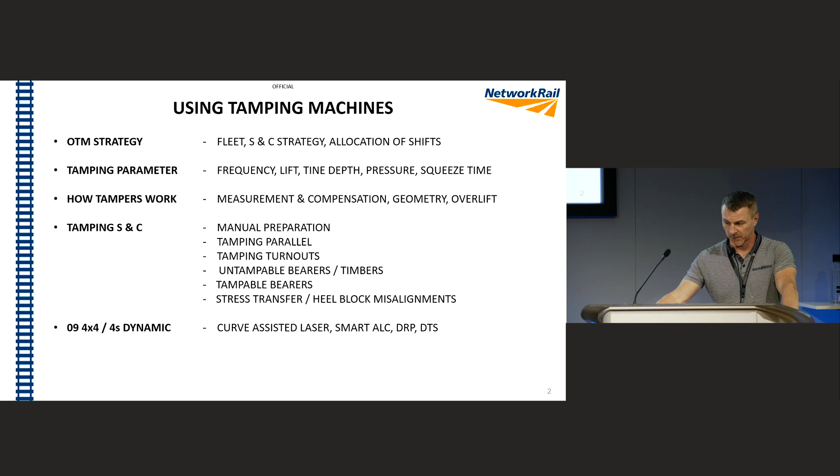First of all, we've got various machines in our fleet, and it's important to have the right type of machine for your particular route. We've got S&C machines, Plasser 08 4x4 and B41 Matisas. Generally designed as S&C machines, but we hammer them a bit on plain line, doing about 400 metres an hour.

Then we move on to our higher speed continuous S&C machines, working about a third quicker on S&C, probably looking at 900 metres an hour on plain line. Then our high speed plain line machines - I didn't actually realise some of the routes had these, 09 3Xs and 2Xs, 3 sleeper continuous tamping machines, very high speed, looking at 2,000 metres an hour. It's quite hard keeping up with them actually. I'm quite glad we haven't got them in our route.

Plain line machines, we've got 08 compacts, does about 500 metres an hour. Got flexible tines, but they're not an S&C machine - I've seen them used on S&C, and they're not an S&C machine. Very good for areas of guardrails, stuff like that. Finally, your stone blowers for areas that don't respond to tamping, and any specialist technology you might want: sprinter tamping, curve assisted laser, DRP, DTS and System 7.

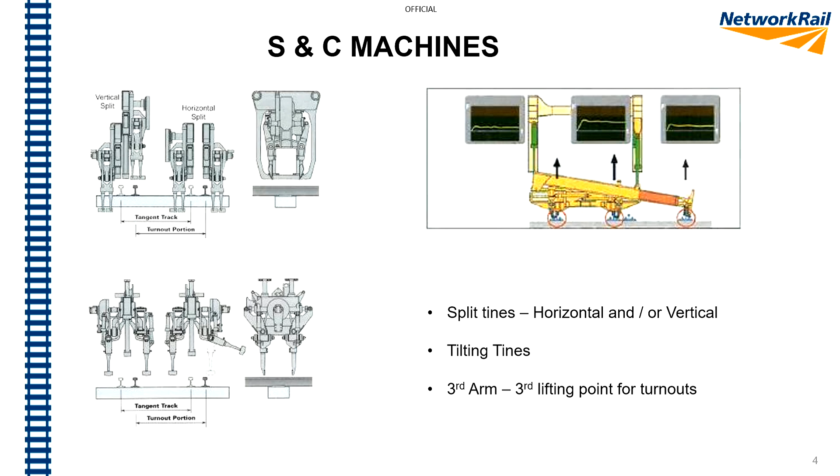Just to put these in though - to constitute an S&C machine, you really need three elements to it. You need to have split tines - as you can see in the top left, you've got horizontal and vertical split. You need tilting tines, and you really need a third arm lifting point for turnouts.

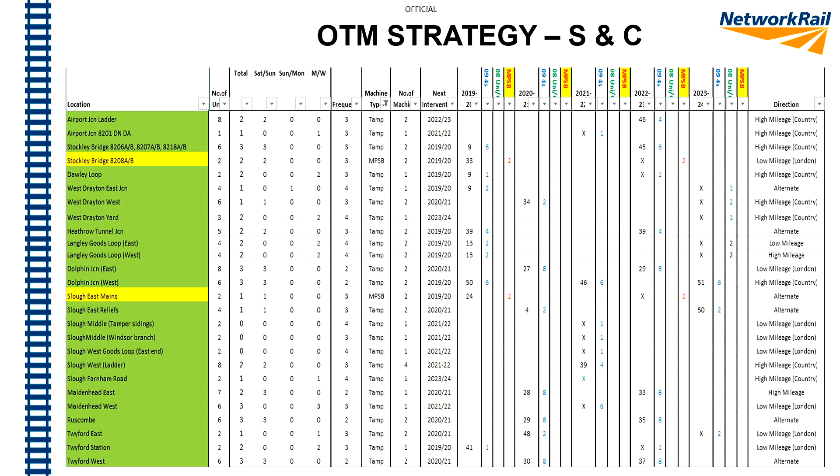Also, we spend a huge amount of money on our S&C, and we should really have a definitive strategy for it. I hear a lot of times, we haven't finished because we don't get that amount of time, or we never finish. What we really need to do is take into account how many point ends, whether we want midweek or Saturday night possessions, which direction, and frequency. What I did was go through every junction and identify exactly what you need. The caveat was: give me 16 hours instead of the usual 10 or 12, but then I'll only tamp that junction once every 2 years instead of every year. So give me what? It's better to do things better every 2 years than not properly every year.

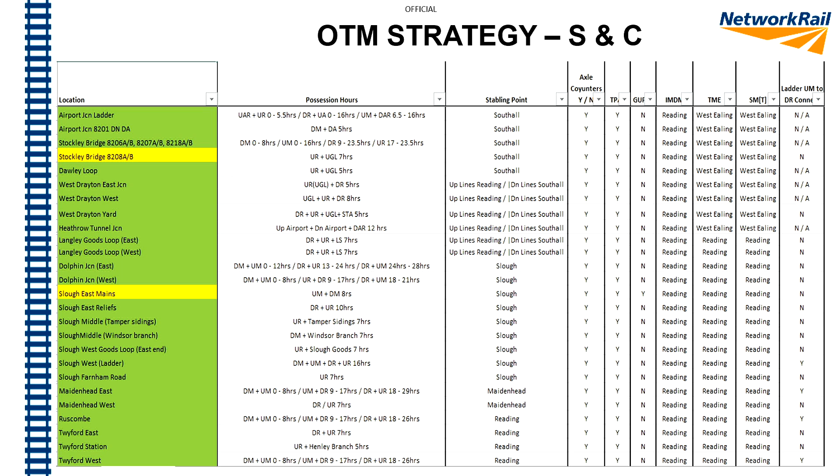Just moving on, possession hours as well. Particularly on our 4-line sections where we have complex ladders, just make sure you've got enough - sometimes you can have ladders where the two middle roads aren't connected, so you want your 2 outside roads and some time in the middle, or are they all connected and you want a rolling block. It's really important to get your detail right in your possessions. You get one hit at it and you need to do it properly.

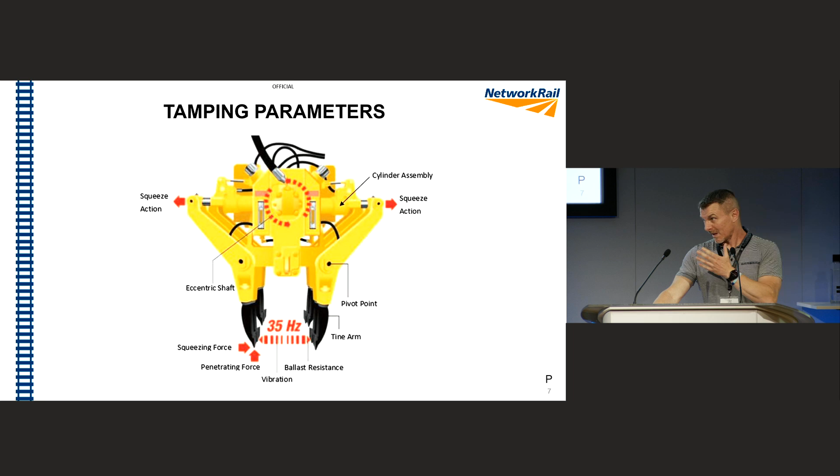So I'll have a quick look at tamping parameters. I just put this slide in - tampers aren't as complicated as what people think. It's basically an eccentric rotating shaft. You've got a cam that rotates. The cylinder assemblies squeeze outwards. It pivots on a point and consolidates the ballast under the sleeper. That's basically what they do.

Moving on, you don't really need to know the top two items on there. It basically vibrates at 35 hertz - 25 to 35 is the optimum, but we have to go up to 35 because we'd have trouble penetrating the ballast around 25, causing damage to ballast and component wear. Amplitude is 5 mil, so we generally get about 10 mil vibration.

These are the things that you probably should keep an eye on. If the operators are good, we generally look at 0.8 to 1.2 second squeeze time - 0.8 for renewals, 1.2 on the maintenance side, depending on lifts and whether we're double tamping. Squeeze pressures should be in that threshold.

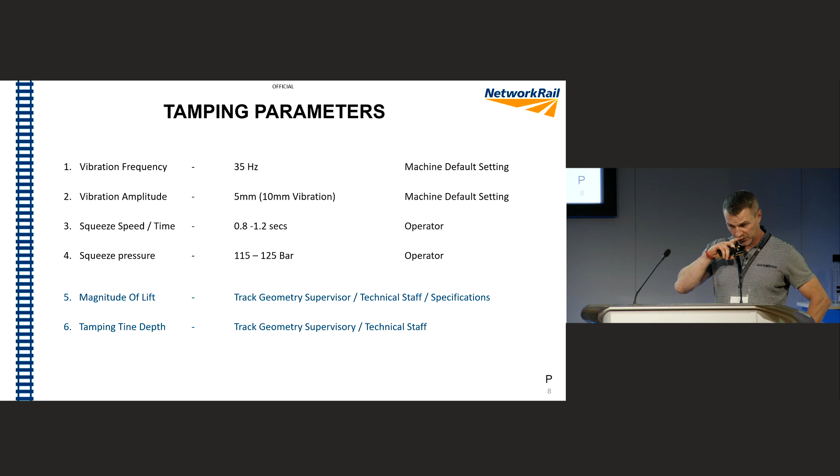A couple of reasons for that. There just isn't enough room to reconfigure the ballast under the sleepers, and under track settlement you're literally using all your lift, something we call ballast memory at times. So it's only when we get into the bigger lifts, about 25, 30, 35, that settlement becomes less of a percentage of the lift, and we get that durability.

The problem is we have standards that, under wires, dictate 25 mil lifts and slews. And the problem with that is we're not lifting the high points, we're lifting our track faults. So the areas where we do need to lift over 25, our lower points, we're just not getting the opportunity to lift it, and therefore we're losing a bit of durability.

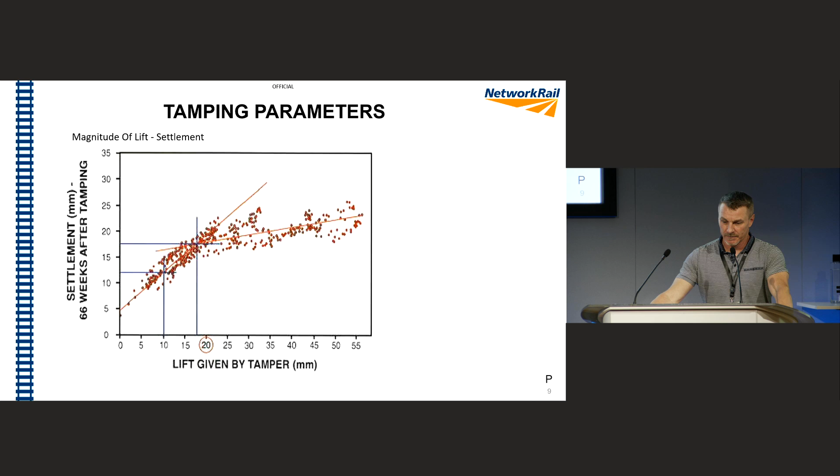And this one, tamping depths, probably our biggest and easiest quick win. The amount of times I see us tamping at the wrong depth is quite incredible, really. Too shallow, and we literally cause damage to the tools on the machine, and we damage the soffit to the bearers or sleepers. Too deep, and yeah, we'll pack it, but we lose durability. All we need to do is measure the top of the rail to the bottom of the sleeper, bearer or timber, and that gives us our construction depth.

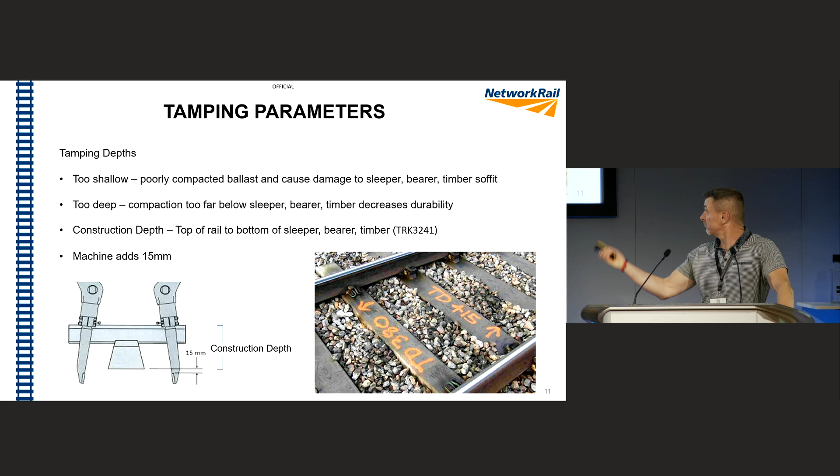There is a list of them in TRK 3241. The machine adds 15 millimetres and off you go, and just on the screen you can see that's how simple it is. Mark it up so the operator can see it, he presses a button and it changes the depth.

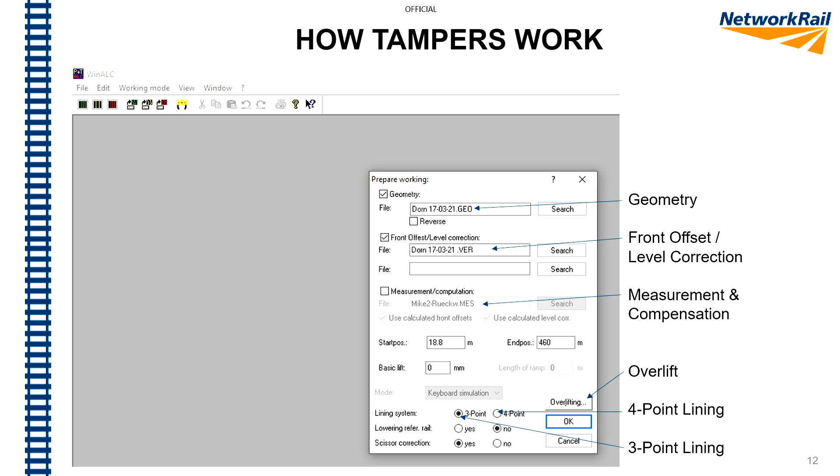Right, moving on to how tampers work. I did have a couple of slides on 3 and 4 point lining, manual ways of using the machine, but they fell victim to the Liam Jackson slide cull. So unfortunately I can't cover that, but if anyone's really keen, they can give us a shout afterwards and I'll go through it. What I will look at is geometry and measurement and compensation, and a tiny bit on overlift.

Just before that though, a bit of tamping basics. A tamper will have a datum rail where it measures and puts its adjustments on, and it'll have what we call a float rail where it applies the cross level or cant required. So just be wary of picking the correct datum rail - the low rail on curves, and on a straight you want your highest or best rail.

And what it also does, it uses a preload where it pushes its measuring trolley out on, and the operators should know this anyway, but they always ask you what preload it is if you're doing a design, and it should be on the running edge of the outside of the curve.

Just so people know, I threw this one in for awareness again - the tampers don't actually apply lifts and slews at the working area. They basically apply it at the front feeler trolley, so it's why they're called front offsets and level corrections. So what basically happens is, for lifting, it'll apply your correction and it'll just basically straighten out its lifting chord, or put the leveling transducer to zero.

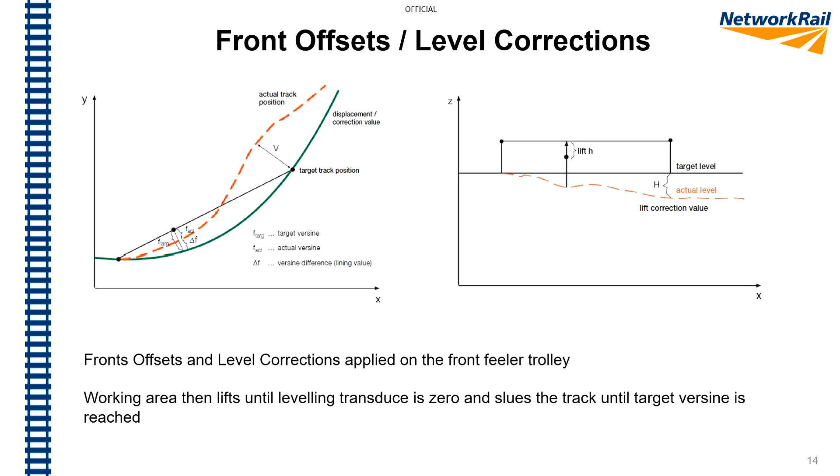And similarly with slews, or front offsets I should say, it basically moves the track over till it achieves its target versine.

Tamper software - we've got Plasser machines, we've got Win and Smart ALC now, and we've got Matisa, which has TGS and Gecko on there. I can only really do Plasser because we haven't got the simulation, we haven't got the program, the software of Matisa. However, we have got Gecko, and basically these do all your horizontal and vertical adjustments.

On the 3 and 4 point lining, one of the problems with it is when you go through transitions, you have to do a lot of smoothing because the tamper won't understand it, so you have to do a lot of manual calculations. Also on vertical curves, sags and hogs, and on a tight curve it will pull the measurement trolley in, so there's a huge amount of manual calculations we used to do. Fortunately, software does it all for you now, so it makes life a lot easier.

So I'm looking at measurement and compensation. I reckon we use this probably 95% of the time, apart from West Coast ATG. What happens is the machine traverses the site and measures horizontal and vertical versines, and it basically smooths or compensates them.

We can actually have a bit of influence on that, we can add our own elements. For instance, when it's going around a curve, we can set that curve to a single radius. Not a lot of people know that, but provided we've got sufficient slews to do it. If you're having a curve that's a mile long, it's a bit ambitious if you can only slew it 25 to have a constant radius curve, but there are options to do that. Vertically, we can put it to a specific gradient, leaving 20 or 30 metres between elements to give the track a chance to connect up.

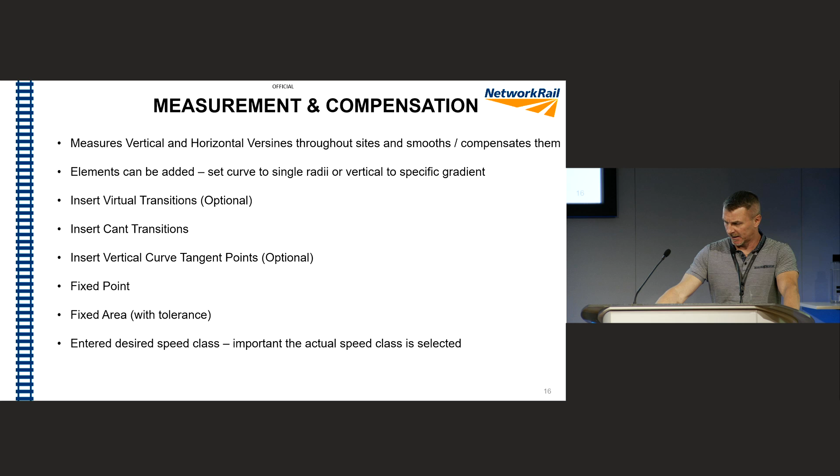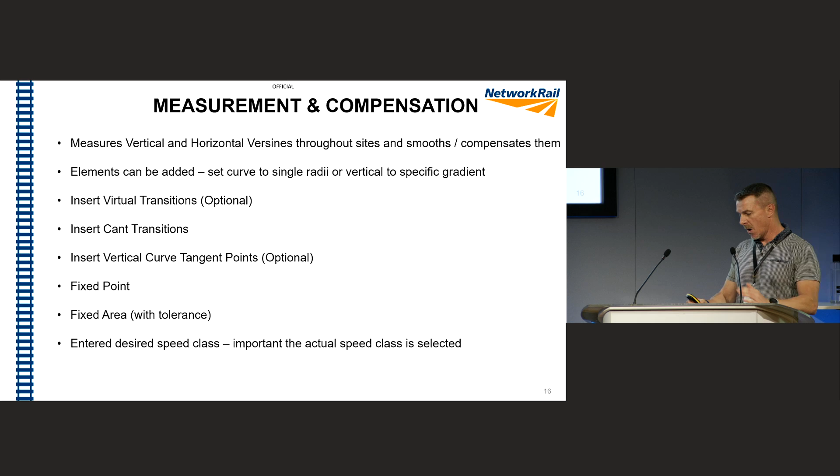Then we enter the speed class of the track, and the machine will smooth out based on that speed class. Now, there is a temptation - I've done it myself before I really understood it - to put a higher speed class in because you get a better quality in your work. But the problem is, the transitions are designed for the rates of change for that speed. So the tamper, if you put a higher speed in, will think there's a problem and want to extend the transitions at both ends to make it smoother. So always put in the speed class that's actually of the track you're on.

Here's a slide of measurement and compensation. I've messed around with this myself, so I'll go through it. On the left you've got your horizontal - hopefully you can see a red line there, which is your measured versines, and the green line is design. We move over to cant, and as you can see the cant follows the curve. Then we've got our level versines, and on the right-hand side it shows you what speed the track can go at.

Hopefully you've noticed the bars on your left - those are SD values. So you've got green for good and yellow for satisfactory. Now, those of you with keen eyes will see a brown bar on the very left-hand side, and that's where I've restricted the slew severely. I also put the speed category just for effect to make it really bad. As you can see, the machine will always try to compensate to good, but because I put those restrictions on, we've got a satisfactory and a poor on there. Had I not put those restrictions - and this is to emphasise the problem - we severely reduce the machine's capability to achieve good track.

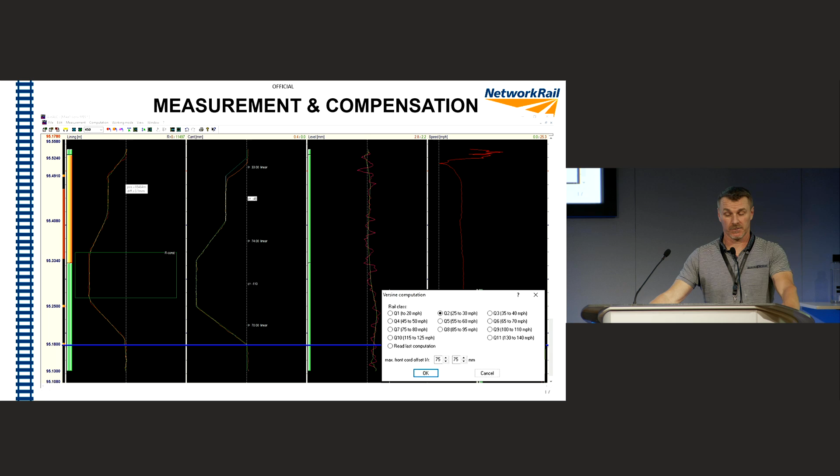There's the speed classes, bottom right-hand side. So that is basically what you do on a measurement run.

Right, moving on. Tampers measure on chords - these are an asymmetric chord, which means it's not symmetrical. Tampers are generally more biased towards the rear chord, about a third, two-thirds to the front. Now, the problem with using chords, there's a couple of issues. Tamper uses asymmetric chords because they're better on shortwave track. But if you have a look - imagine that's a chord on, it's a bit of a busy slide, don't worry too much about it - the idea is to try and show you a chord in a long wavelength.

The problem is, because the chord's inside a long wave defect, it distorts the amplitude and phase displacement - phase displacement is just the angle. So it distorts the size of the defect and the angle that it's at, and this is known as the transfer function. Now, ALC has built-in algorithms that define the inverse transfer function, so they can compensate for this. When you're inside a long wave defect, the tamper can realise that and adjust accordingly. On top of that, it's got a factor algorithm - there was a lot of experiments and research done on it, using a long optic to verify the results. What it does is use a number of algorithms to extend the chord, so our tamping machines can work at 5 times the chord length, and can actually correct defects of 90 metre wavelength.

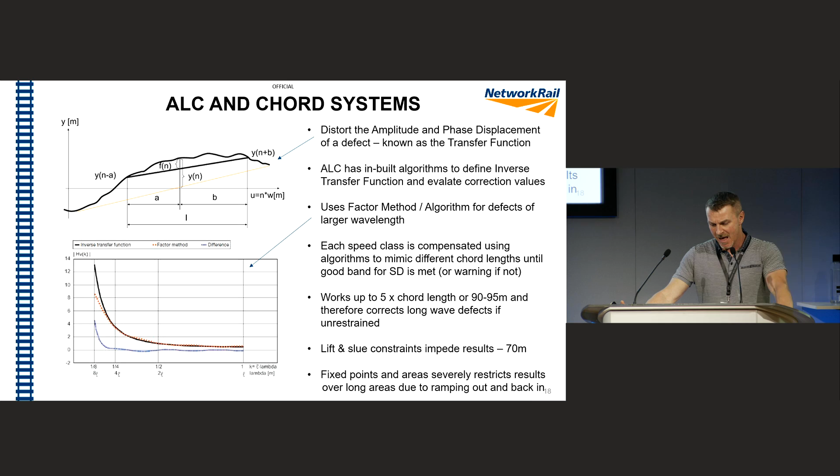So as you can see, there's quite a lot more to ALC than what people think. It's a great system, we just don't let it work. And on top of that, not only do we limit the lifts and slews to 25, we then come in and put fixed points in, which severely restricts it even more.

And the best one is when we're doing crossovers in S&C. Come to the crossover, most important point, and we'll put a fixed point in, and people say no slew here or 5 mil there. And so not only are you doing that, the tamper's got to ramp down. It can't just go to slew and zero because we leave it.

So if we're doing a 25 mil in S&C, but you've got a no slew or reduced slew, don't forget the tamper has to ramp down at about 1 in 1,000, that's a default setting. So 25 mil is 25 metres of ramping down, and then it's got to ramp back up. So by putting fixed points in, we're just severely restricting what these machines can do.

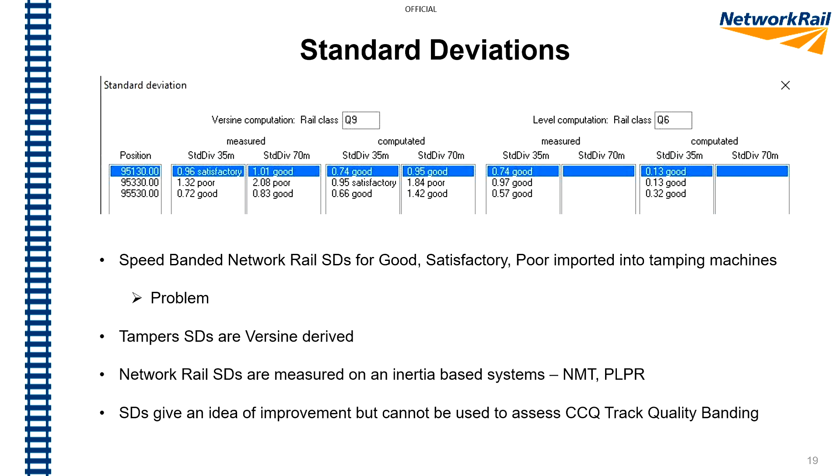Very quickly, the machines have got all the Network Rail SDs imported in. The only problem is that the tamper SDs are Versine derived and the Network Rail ones are inertia based. So it's apples and oranges to an extent. They're similar, but if you get good on a tamping machine, don't be surprised if you don't get good when the NMT runs along it, because they are slightly different, but it definitely gives you an idea.

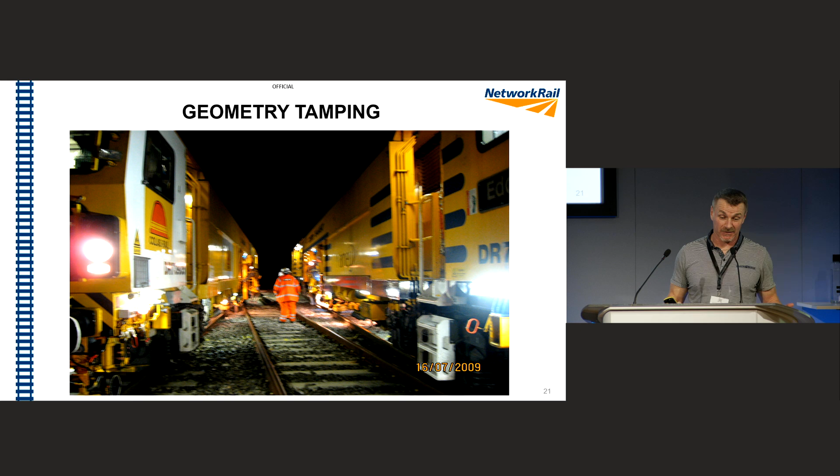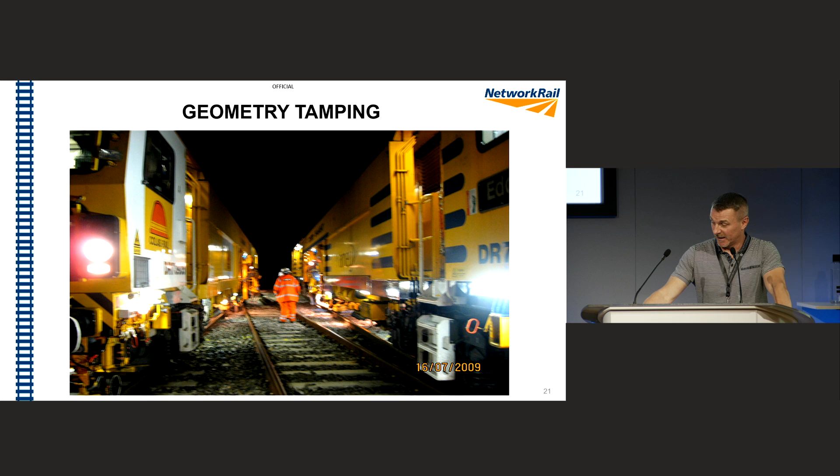Moving on to geometry tamping. We basically need a design for this, and we generally do a geodetic survey. We use a symmetrical chord, generally 20 metres. This is better for long wave stuff, particularly around 40 metre defects. We might use a theodolite level, total station, and we have various kit to help us do this.

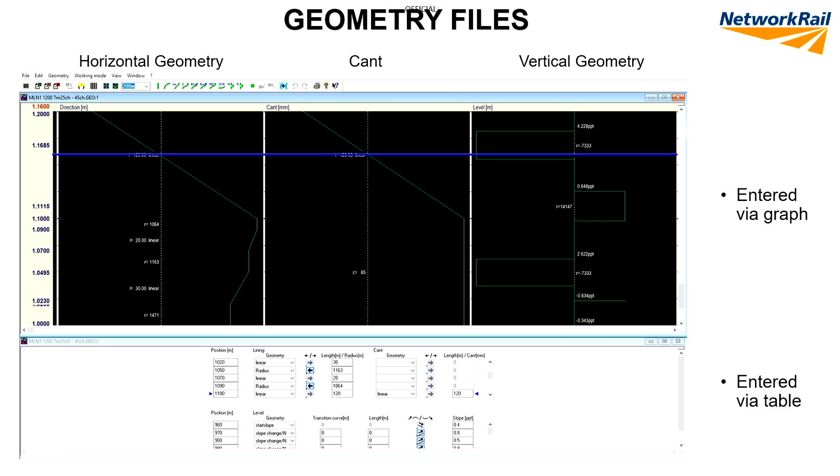And once we've done a design, all we do is just input the design. So on the left-hand side, again, it's the horizontal - that is basically a right-hand curve going into a reverse curve. You can see the cant in the middle reflecting the reverse curve, and you've got the vertical on the right-hand side. So each line is a gradient change. The boxes on the left are sags, and the boxes on the right are hogs, and you can see the curve radii.

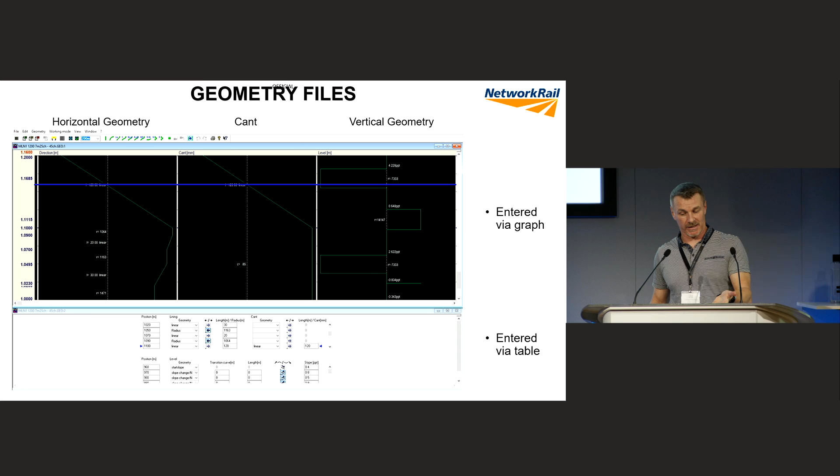So you can enter that by pressing on the graph and putting an element in, or doing it in the table - much easier to do it on the table, actually. Same with Versine, same with front offsets, level corrections. You can either enter them on the graph, or you can do it in a table, or there is a cheat mode. One of the lads on the West Coast actually devised an Excel spreadsheet where you could directly import them into there. And unfortunately, it was about 17 years after we've been using it, but I suppose better late than never.

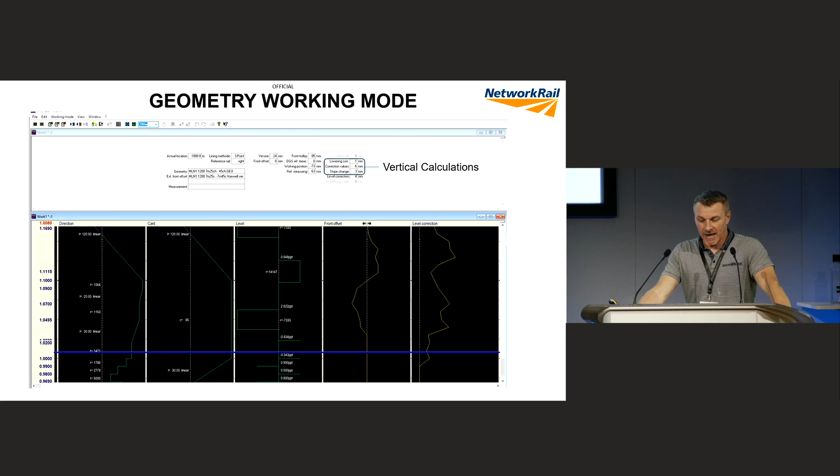Geometry working mode. So I've put the vertical calculations on there, the ones we'd have to do in manual mode if we were 3 and 4 point lining. As you can see, hopefully you're getting used to this now. The horizontals on the left, then our cant, then our level, and then our front offsets and level corrections. That's basically geometry in working mode.

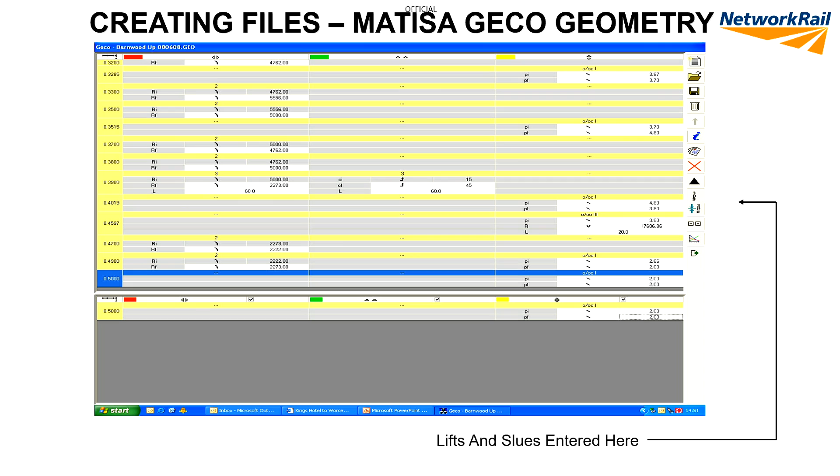This is Matisa GECO, the equivalent of WinALC. As you can see, not as user-friendly, takes a bit more getting used to. A couple of things you've really got to watch: Matisa GECO works in kilometres, whereas ALC is metres. Also, crucially, you have to put the full vertical curve length in GECO, whereas in WinALC it's half the curve length, so don't get them wrong. And finally, both of them, the gradients are parts per thousand, and we design in percent, so always times it by 10.

Why use geometry? When we get precise control through structures, it's absolutely essential for S&C. Anything that's tied, we need to know what we're doing with one road, so we get coplanar timbers and slews that are harmonious. Also good for palliative lifts.

We used to do a lot of these quite a few years back where we'd have formation failures. We used to lift the track by about 4 to 6 inches, probably unheard of now, coming with a ballast train, and that was a good life extension exercise.

Also good for advanced tamping. Obviously the staff that work on the ATG couldn't do their job without geometry. Good for MSAT, curve-assisted laser.

We could also, using some of those formulas that I pointed out on the graphs, design overlift. We can actually do a design and then predict what overlift we can put on. And obviously, because it's improved quality, it's less intervention, greater durability.

We don't have to mark up the track. Anyone that's worked with an O7 knows it's a bit of a nightmare, actually. You had to put all the slews on the sleepers, all the lifts on the rail, and you'd have some poor soul trying to wind them on in the tower. You'd look behind the machine and it was a mess, and you'd just wait till the relief came on. It was an absolute nightmare.

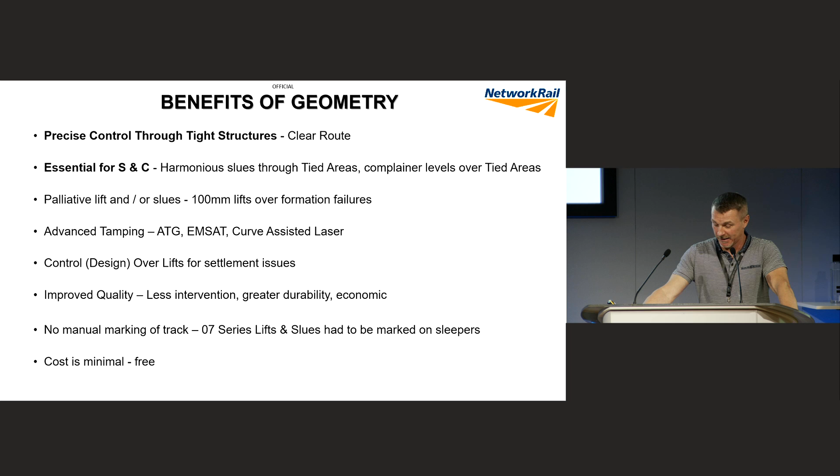And the cost is minimal, it's free, it's built in on the machine, so it's there.

So this is one to do with a design we did using ClearRoute. This is an interesting one - those with keen eyes will probably make out a steam train. We had to slew one track out the way 8 inches so we could slew the other track into the right position to get the steam train through.

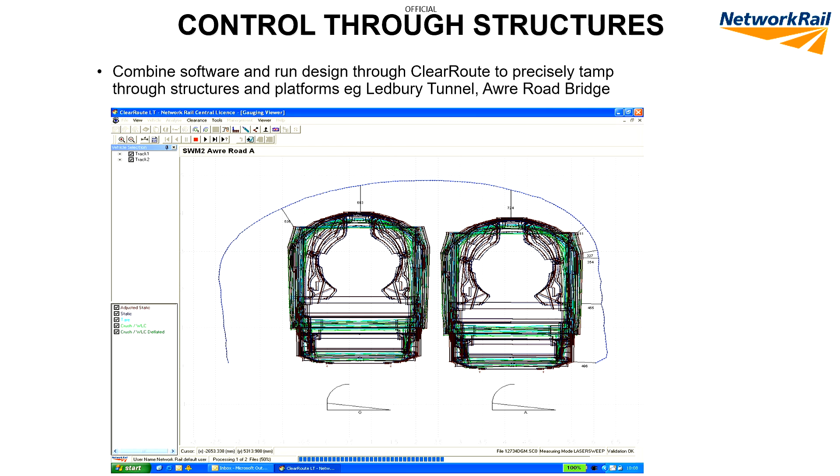Anyway, we did this - I did this in one pass, actually. These are the days when you could do that, by the way. Yeah, just saw a few wry smiles there. Now it's basically where you're allowed 75mm lift, 75mm slew, and 50mm cross level correction. So please don't go saying some bloke from Weston said I can move the track 80, because that's not the case now.

Anyway, we basically got that in one go, and just a couple of weeks before the job there was a rail defect, quite an old one - 1968 F19 actually, a pretty old track, riddled with defects, 109 lb rail I think. They took the defect out, and as usual didn't have time to re-stress it, so they had to put it back in as a red item. But we'd actually come in and slewed it that much that when the staff came in to re-stress it, they cut into it, took the stress-free temperature, and it was 26.7 degrees. If I'd known that, I could have sent out a job number and got some money for it, but there you go. So yeah, it's an interesting story there.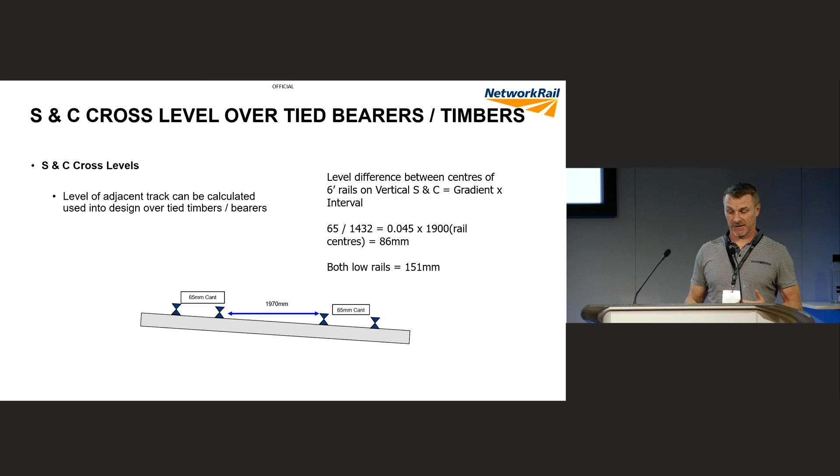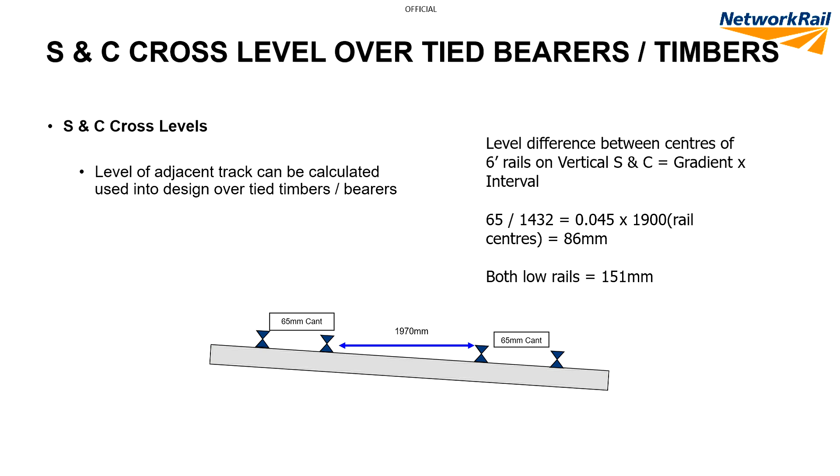It's really good for designing crossovers, really easy - just get your tied area on a crossover, calculate and design your low rail first, dead easy. I did an example here: 65mm cant on a standard interval, your 2 low rails is 151mm difference. So what you do is design your bottom rails, then just add 151 or whatever it is, and design in and out of it. Very easy to do, and it gets all your bearers and timbers coplanar.

Overlift is basically where we design above our target area to compensate for settlement. This gives us our durability because we're taking into account how much the track will settle. If we just design it to where we want after settlement, it will end up below, so it's just taking that into account.

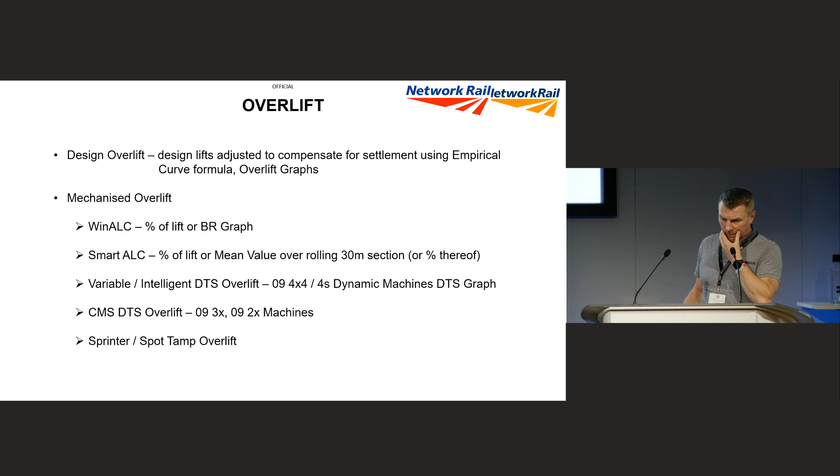We've got various ways of doing this. We can design our own overlift using our own design, or use various options on the machine. With ALC you can do a percentage of the lift, or there's a BR graph from the 1960s from some research. The new 09 machines have smart ALC, where you can do a percentage of the lift, or a mean value rolling over 30 metres.

So basically anything under that mean value gets overlifted to that point, or you can do a percentage of it. We've got intelligent overlift DTS, done on recent research about settlement after DTS. We've got the older DTS machines, the 09s, which have a slightly different system from older research. And finally we've got an overlift option on the Sprinter, or spot tamping.

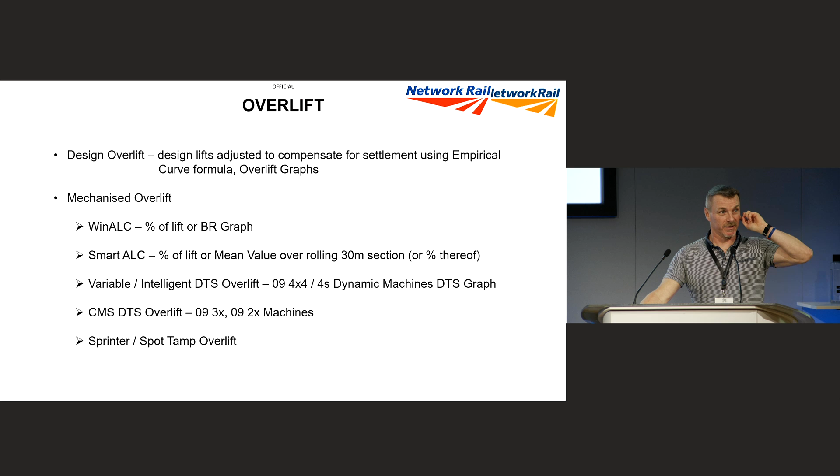I haven't got time to go through Sprinter tamping or overlift in detail, but the communities of practice are run by Gary Smith - I was hoping Gary would be here, I'll point it out, but he's probably skulking around the screen in Tamworth somewhere, so he's got away with it. Hopefully we'll have something done by August, so if anyone's really interested in Sprinter and overlift we'll have a definitive guide then.

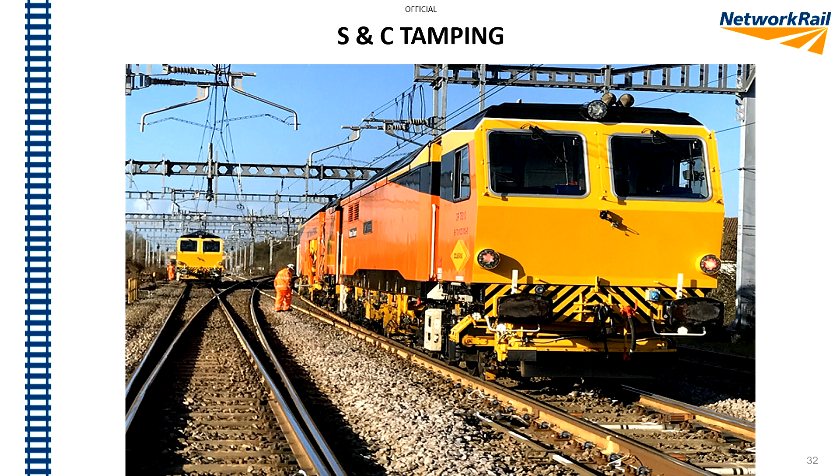So we're moving on to S&C tamping now. First of all, tamping parallel - traditionally we used to do this with one machine, using a third arm not designed for a crossover, right, it's designed for a turnout.

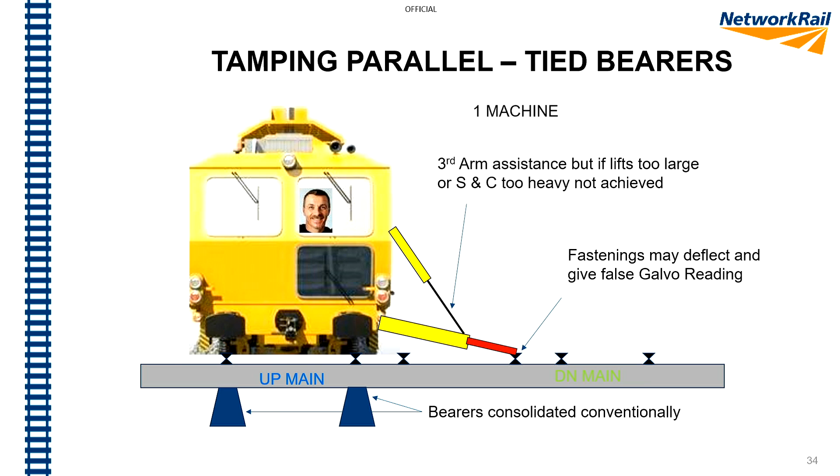So what we used to do was basically open the fastening. We used to think we were getting cross levels, opening clips, ruining clips, and then as soon as we let go it would fall back down. It's labour intensive, time consuming, and inaccurate.

Basically, if it's a crossover, don't use one machine - that's the message I'm trying to get across. Use... yeah, it's Neil Denton joined us there as well, it's very nice of him, isn't it?

Yeah, so if we're using basically 2 machines, what you've got to do is connect the machines up. Now if you've got a layout with high resistance fastenings, concrete bearers - say if you've got e-clip or Fastclip or something - then you connect the machines up and they'll lift together harmoniously, but basically you have a primary and secondary machine.

The primary machine will be the one that slews, and you turn the slewing off at the first tied bearer and turn it back on at the last. So basically they both lift, but the primary machine slews. And that's what it says in the standard.

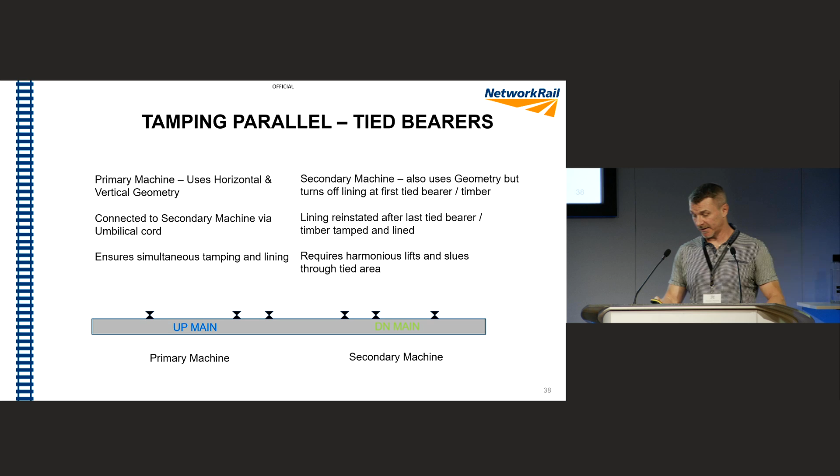So by turning the alignment off, you will end up with a misalignment. So you've got to make a judgment. In this case, what we basically do is lift harmoniously but slew independently, but try and keep the slews in. Every now and again they'll be fighting each other, basically because you might have gauge problems or some other issues in there.

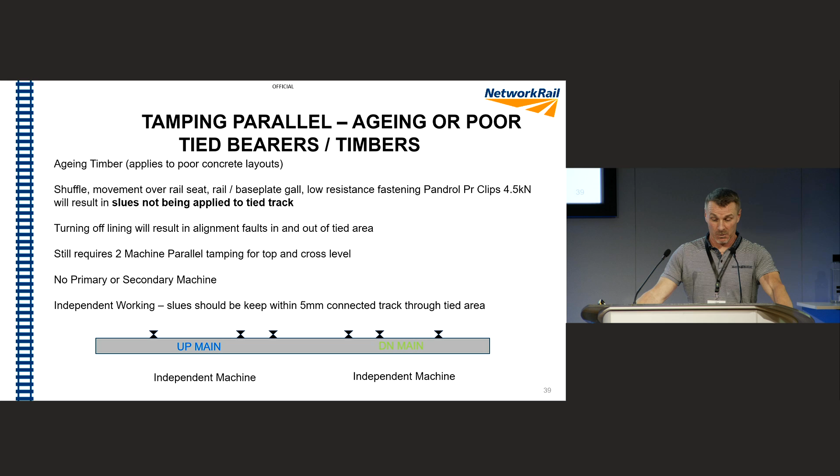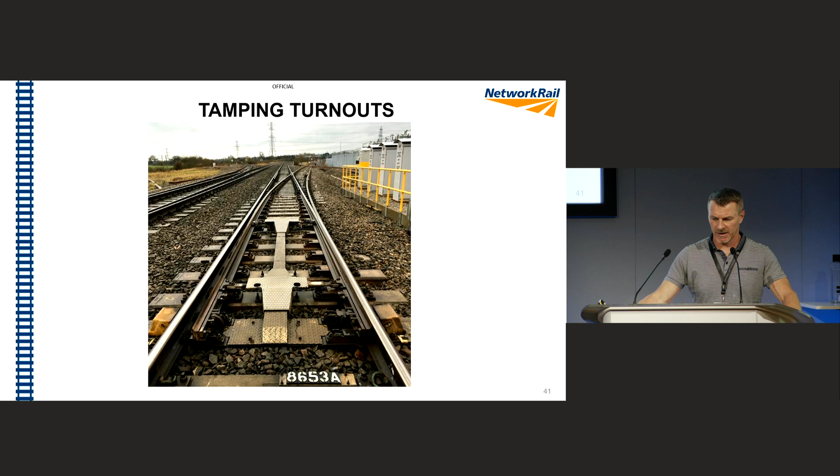So just be very wary. What the standard says is great for renewals and new layouts, but I tell you now, and there's people watching around the country who know, it does not work on these older layouts and you end up with a misalignment. So use the machines independently, but be wary and try and keep your slews within 5mm. Right, moving on to tamping turnouts.

There's a bit more to this - it's more difficult to tamp a turnout than a crossover. What we traditionally do is take the through route, do the through road, and then do the turnout road. What happens is, again, we get the third arm out.

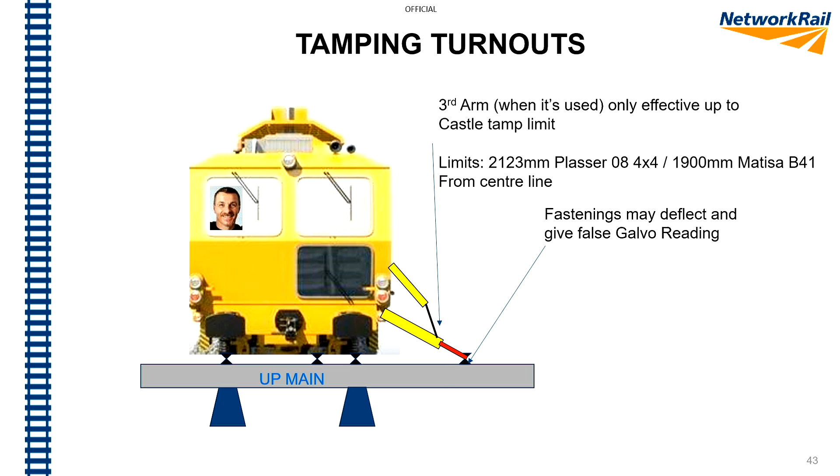The limits are there - for Plasser it's 2.1 metres, for Matisa it's 1.9. Again we lift it up and the fastenings deflect, they open. We let go and it falls back down, even though on the machine it said we got the cross level, because we're basically just opening clips. Where the track's tied, we've got that because we're not getting the cross level.

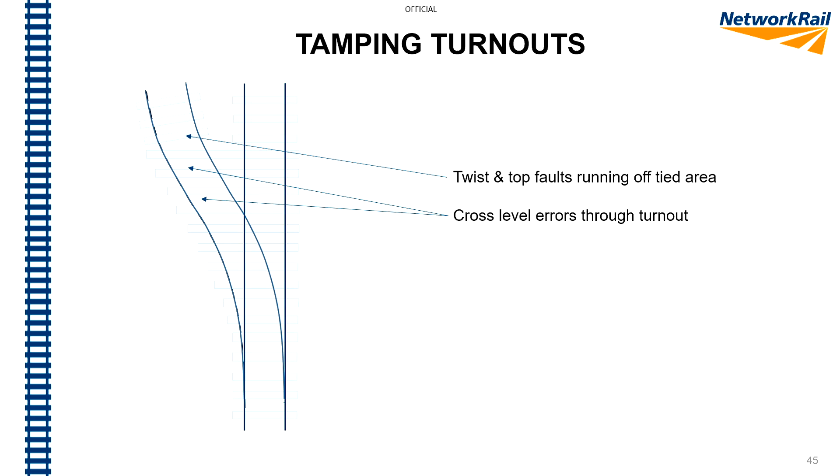As soon as we get back onto the plain area, we've got that. So we have cross level faults through the turnout and we'll have a twist on there. I've seen that happen on numerous occasions.

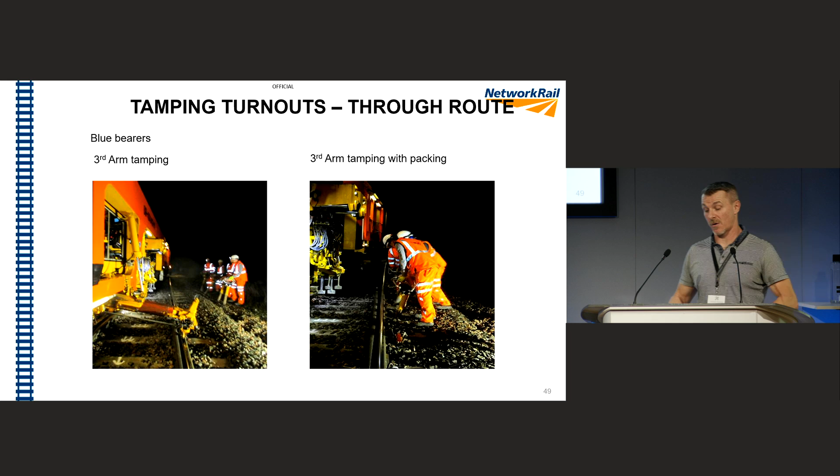However, when we get a bit further on, the blue bearers, we need a bit of assistance, so we bring out the third arm and some packing. The castle tamping limit's gone now. So we get the third arm to help, but then the operatives come in and pack it - it's basically to keep the cross levels, because we'll come back with a machine and consolidate it properly afterwards. So we have to do that.

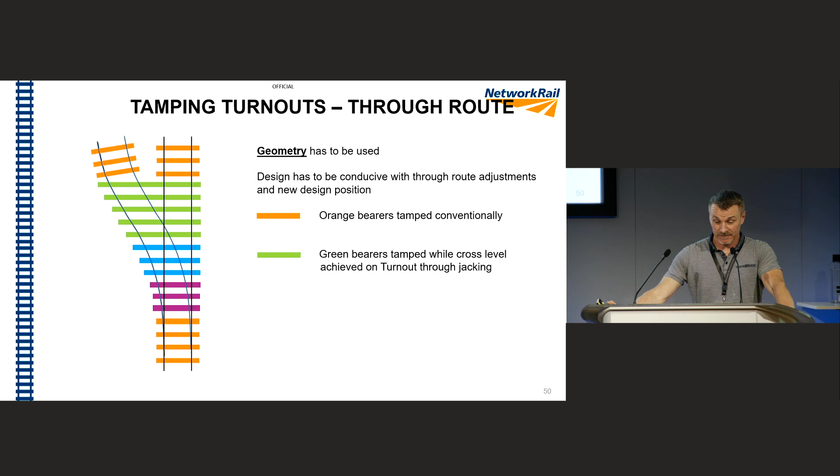And then as we go through, it gets to the stage where the third arm limit is reached, and then we get to the green bearers. On the green bearers we're literally relying on track jacks, so you need your staff out with jacks and you literally jack up. You can actually put a cant gauge on it, but I prefer to look at the level galvo, the centre galvo in the machine - when it's 12 o'clock, you've got your level. So you jack it up, hit 12 o'clock, lads come in and pack it, staff come in and pack it, and you can then move on.

And then you get to your orange bearers on the plain, and you can just tamp conventionally. But as you can see, there is quite a lot to tamp in a turnout. And that's just the through route.

So when we get to the turnout route, we can ignore the purple bearers because we've tamped and consolidated them via castle tamping. But the green bearers are the ones we've just packed manually, so they need a proper squeeze - we're not lifting or lining, we're just squeezing with the machine to give it compaction. Then when we get to the blue bearers, which is the first plain bearer, we basically get the design back on. Obviously the design has to be conducive with our adjustments on the through route, so you need to make sure you take into account what you're lifting and slewing on the through route, and then you can execute your design on the turnout route.

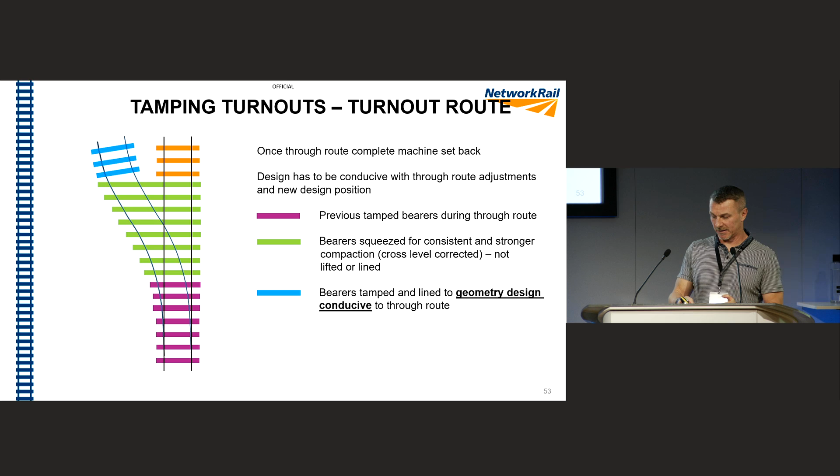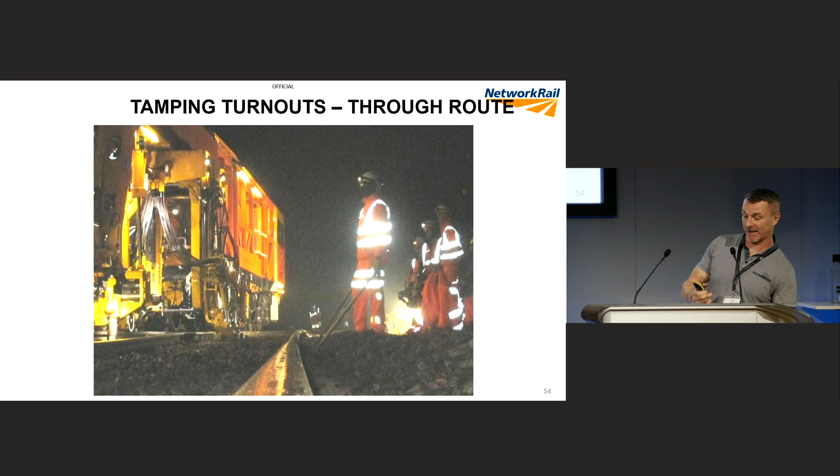As you can see, this is probably one of the biggest examples I've got. You can see how much we actually jack. You can see this was a double junction - the cross levels were absolutely way out, and you can see from that picture how much we actually had to jack that one up.

So we come to the first plain bearer, and at the bottom where that's the front trolley of the machine, the blue line, we're basically on the geometry, so we're just cross-level correcting until we come - and you can see the lift on the first plain bearer where we bring the geometry in. That was 57 mil.

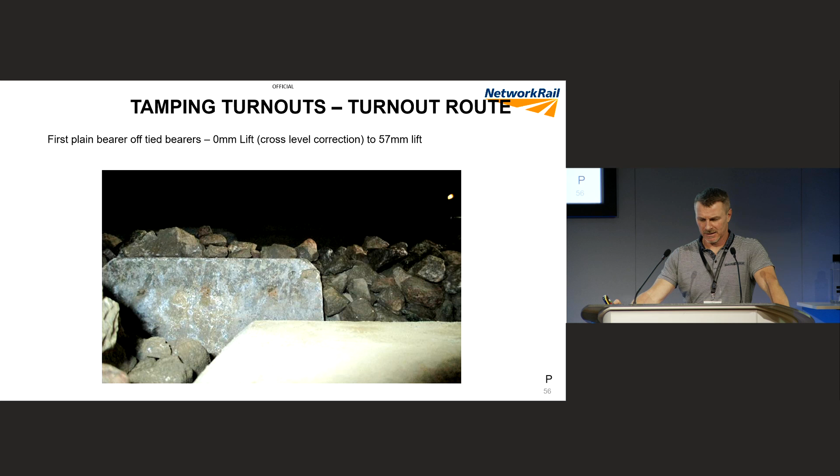So I had the operator saying, God, I've never ever done that - he was flapping a bit, never done that before. But I got out from the machine and, yeah, because we corrected the cross level that much, I measured that to be 56 mil, so I can take 1 mil out. But yeah, because we brought it so much back up to cross level, you could see - we went from 0 to 57 mil lift over one bearer. I'm quite glad I don't do that on every shift, to be fair.

Moving on to untampable bearers.

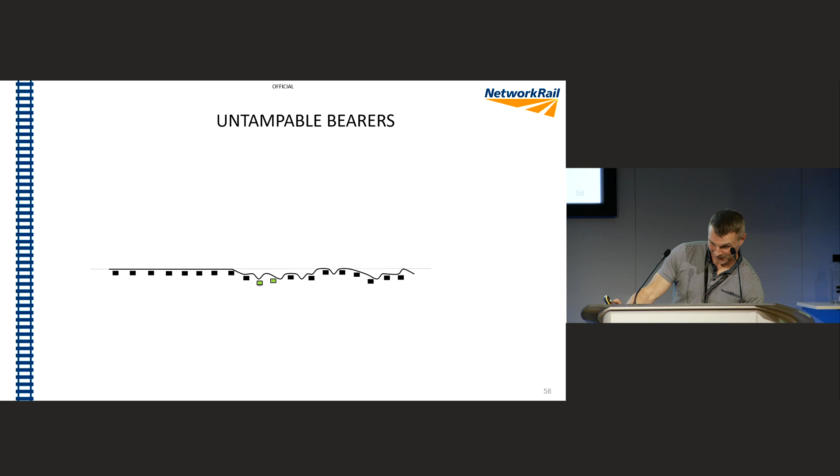Right, untampable bearers. This is another huge mistake we make. So what normally happens is the tamper comes in, we tamp brilliantly, we do all our plain line, and it comes to our POE, because we don't remove the POE, we lift and line, but we don't tamp.

So what happens is the machine's axle comes in and crushes it back down, basically. So although we've lifted and lined, we haven't tamped. The weight of the rear bogie pushes it down, and then the rear trolley, we're telling the machine that the rear trolley should be on that fine line. However, the machine has fallen into the void, so it creates an error. So we've done two things there.

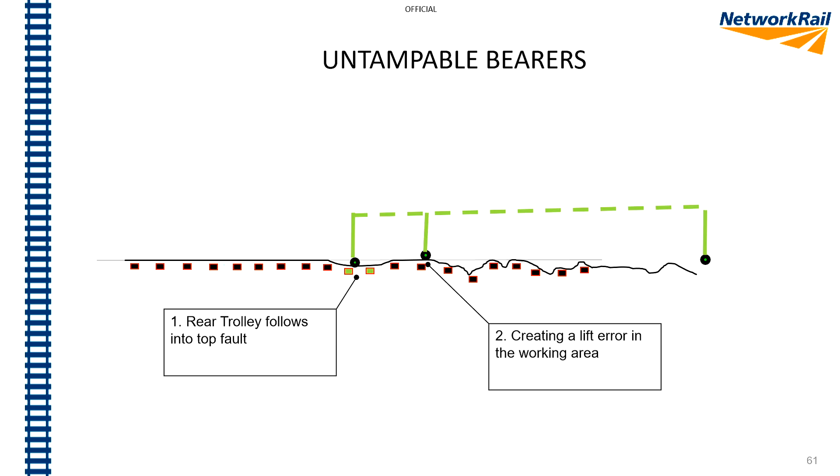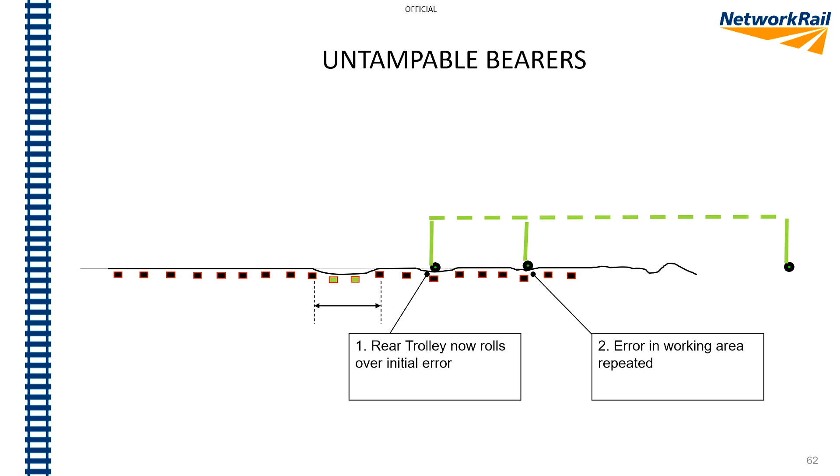Our most critical area we haven't tamped, so what we've done is tamp the track around it, making it good, and then our POE basically doesn't get tamped, and then we create an error, which then self-perpetuates, and then we create another error. It's called phase shift, and we send the tamper in to do a junction, and we wonder why we've got point failures every two minutes, because we're not tamping the most critical bit.

Untampable bearers, and what we basically do is remove the POE, double tamp, treble tamp at the correct depth. Sorry about the picture, it was a 2004 picture. But that is the staff as the machine's being lifted.

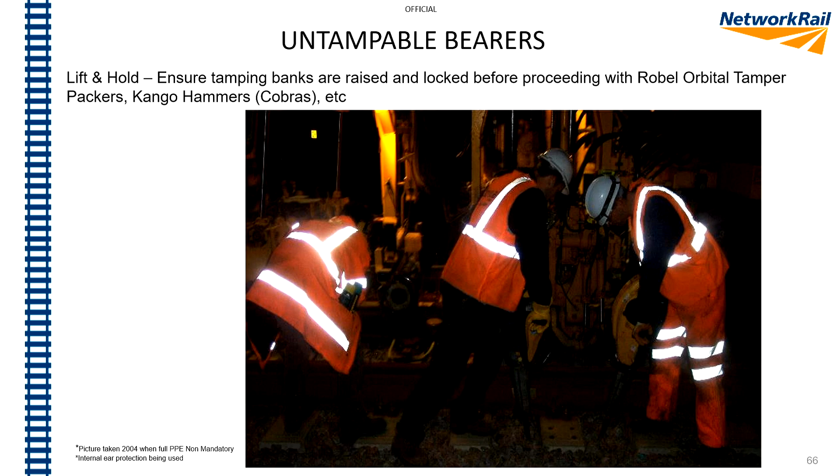You can either remove the POE, or we can lift and hold where we haven't got time. So the machine will lift and line, and the staff will come in. And what will basically happen is we've basically tamped the whole lot and we haven't got any errors. And then the machine will toddle off and we'll all go home happy.

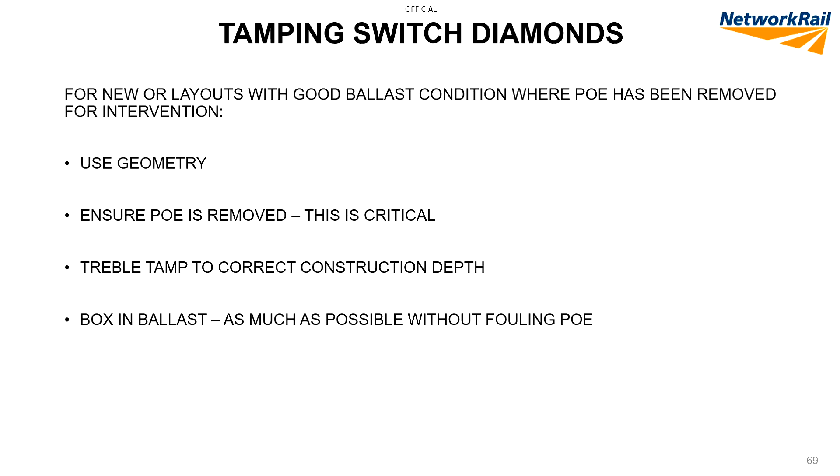However, I had a bit of a bad experience where we basically lifted and lined a switch diamond, and thought we left it great. By the Monday morning, it was failing all over the place, and what had happened was our old friend ballast memory had come in. The POE hadn't been removed for 8 years. We come in, tamp it, and it was back.

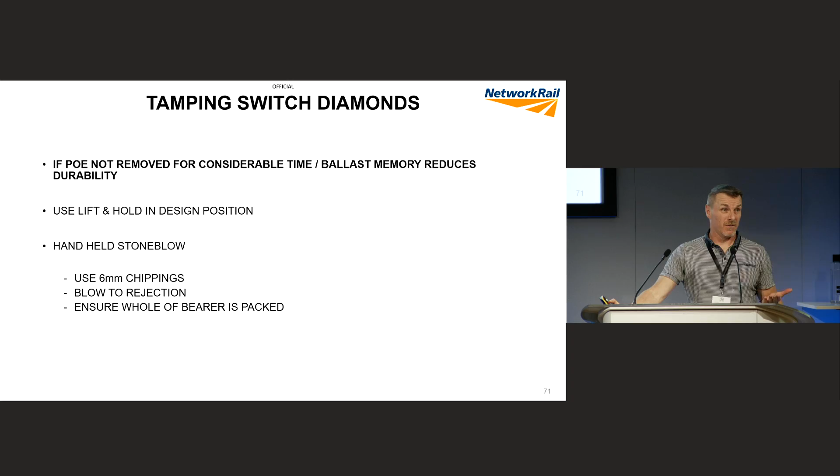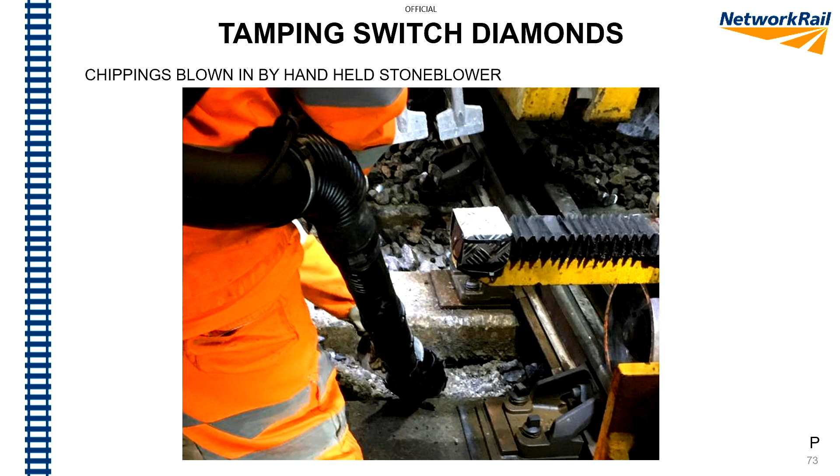Fortunately now I've got a ticket for that, so someone else can be on their hands and knees in the mud on a Saturday night. But basically, in situations like that, tamping won't work, because it's been so long since the POE came off, we basically need to put chippings in.

There are 3 systems that we can tamp with: HPSS, HyDrive, and in-bearer clamp locks. Want to have a quick look, because I'm running a bit short of time.

So what you basically do is undo or crack the bolts by 6mm, tap each bolt so it can all move with a key and hammer, literally come in with a tamper or slewing jack, line it and torque it back up. And these are some of the results.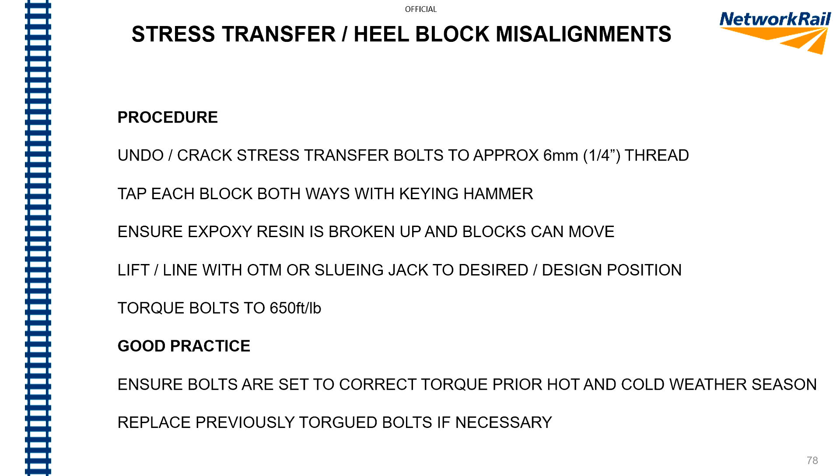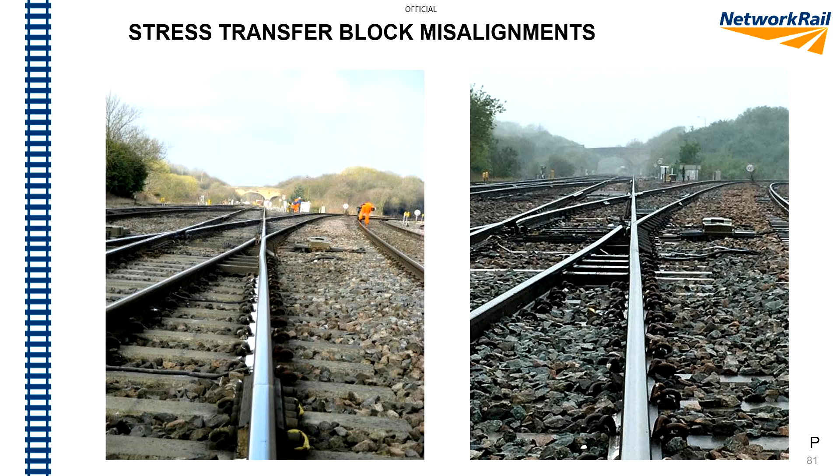This is, Alex will know this site, probably took 10 years of his life actually. As you can see on the left-hand side, you can see the difference it makes before and after. Here's a switch diamond, before and after, and there's the right-hand side of the switch diamond. So unless you do that procedure right, those alignments aren't coming out. This is one on a full depth layout, just to prove it as well.

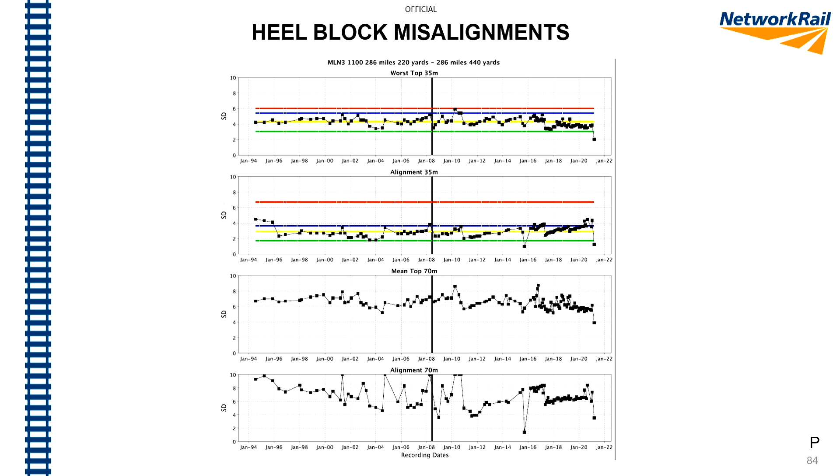So these are heel blocks as opposed to stress transfer. As you can see on the bottom, we went from very poor to good. And apart from a spurious reading, it was the best alignment it's ever been since it's been recorded in 1994. So it made a huge difference.

I'm going to have to really race. Is everyone still with me, by the way? I'm feeling it as well, don't you worry. Just give me 2 seconds.

Right, very quickly, I'll just try and get through curve lasers. I've got about 3 or 4 minutes. I'd have had a bit longer if my introduction wasn't 5 minutes long, wouldn't I?

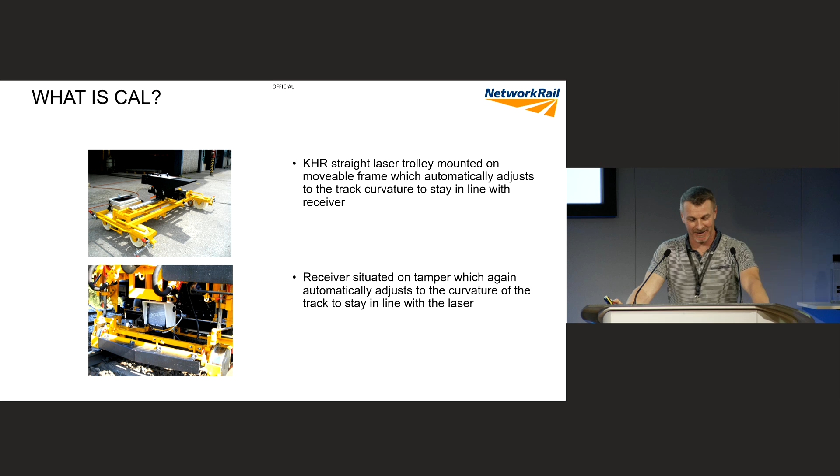There are 2 modes, direct and indirect, and all we need is the vertical and a design, basically, and that design to a fixed point. What happens is the trolley's on our fixed point, the machine works up to it, measures, the trolley goes out and the machine works up and measures, and you just get into a rhythm.

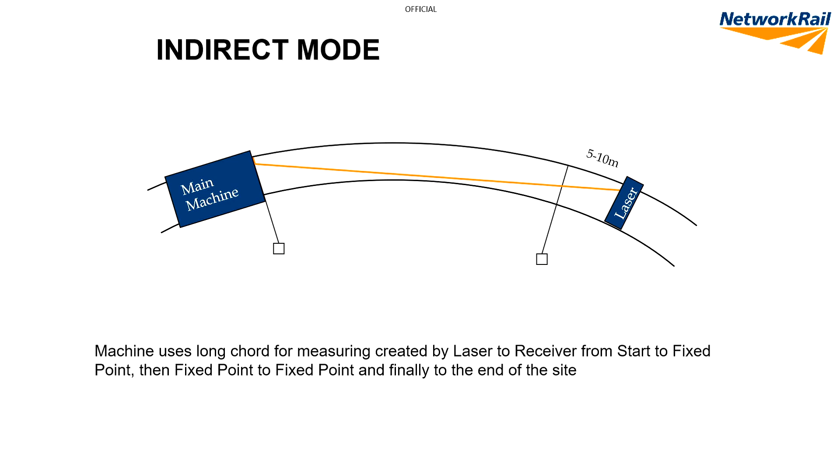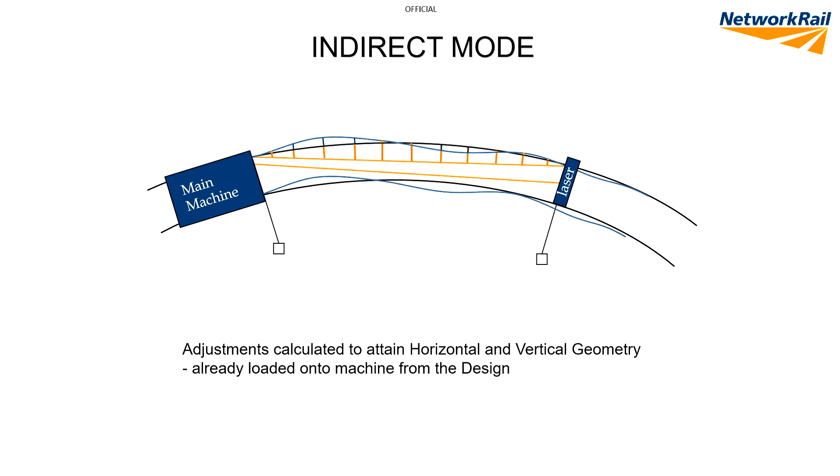The laser creates a long chord, displaced to the running edge of the rail. We then apply the design and the adjustments to it, and the machine measures the adjustments. We then add our fixed point data, so the machine does its first adjustments to get our design, and we get it in the right position. We can then assess it, and if we're happy with the lifts and slews, you can either commence tamping them, or do it on a Thursday night and tamp it on the Saturday.

You should be familiar with this now, horizontal levels, but also you can see the mid-table there is our front offsets where we've got our design, and then we put our polygon points in to say we want that shifted, and you can see where it's shifted over after we put our polygon points in, so we're getting the design in the correct position.

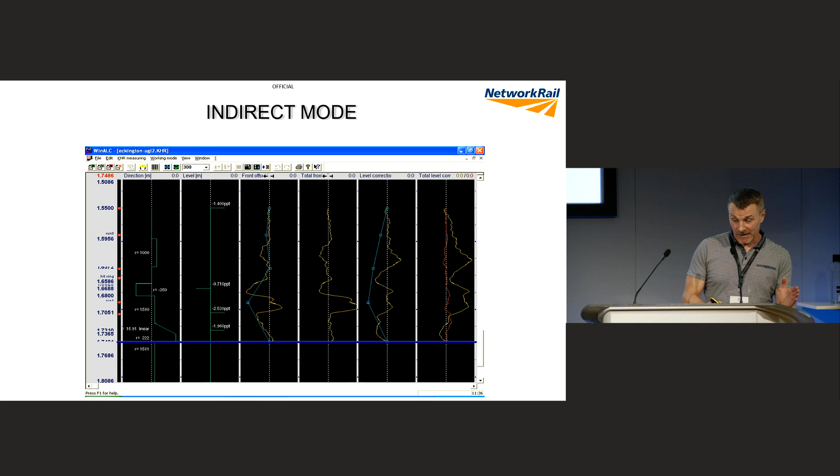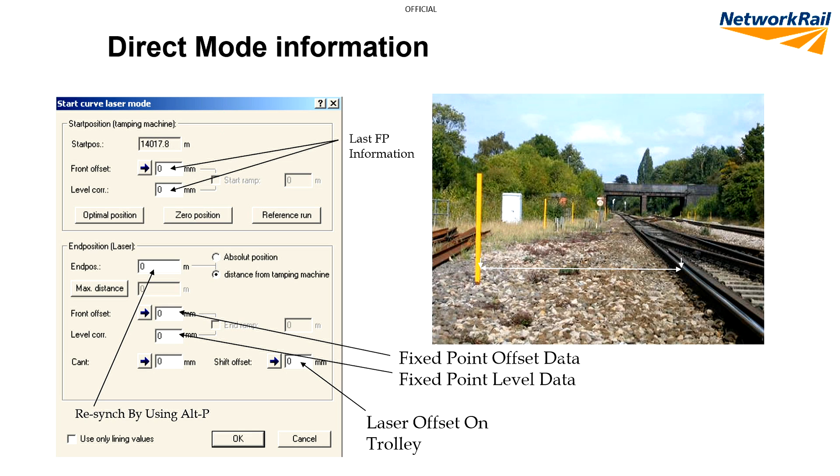And you can have it in direct mode as well, where you put the fixed point information as you tamp, but you've got to be very confident with your data and make sure you've done it before and are happy with it. The big beauty of this is the long chord measurement.

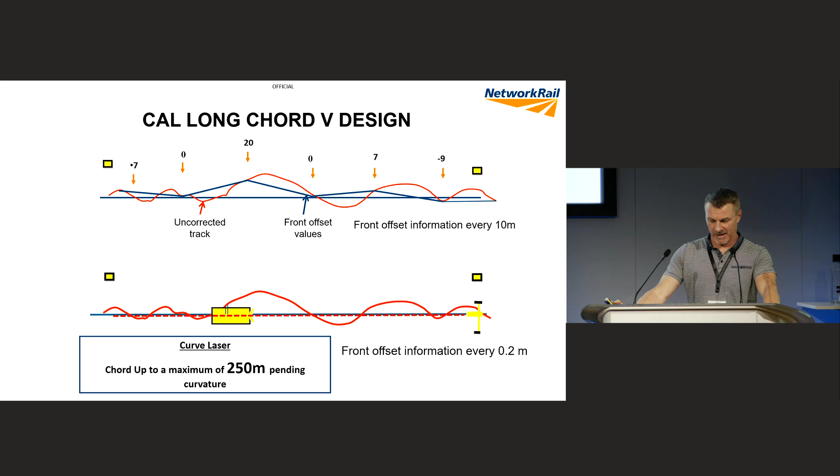So remember the defects I was talking about before? Yeah, so it gets your 250 metre chord, measures every 200 mil, every defect's picked up. It's a computer generated chord, so there's no errors, and we get dynamic measuring because of the weight of the machine. So we're not missing out defects. This is just showing you the advantages of every 200 mil on a 250, so everything's picked up.

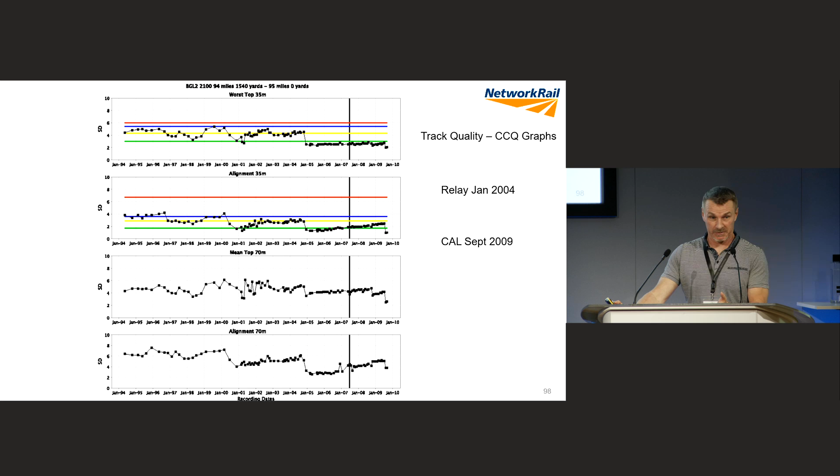Again these are good layouts. As you can see, this layout was relaid in 2004. We came in 2009 and actually improved it from relay. So it was already good, but as you can see from these charts, not only was it good, we improved it. Once again, big improvements at relay. We came in with curve laser 5 years later, made it even better, and that story says the same thing.

Very quick one, I've got the 2-minute nod here. Very quick one, smart ALC.

This is available on the 09 machines. We can have it going vertically or horizontally. As you can see, that's in measurement mode, showing you where the 3 measurement trolleys are. This is it in work mode. The beauty of this is, for the first time, you can actually simulate overlift. So I've put that on there in green. Before you actually tamp, you can simulate through and see exactly what overlifts you've come on. We haven't had that facility in the past.

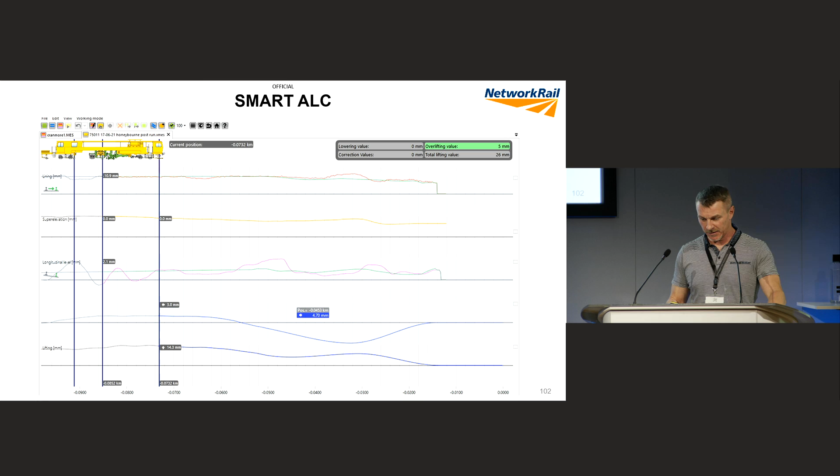And it's also got improved algorithms, what I was talking about before. Factor algorithms, be dreaming about that tonight.

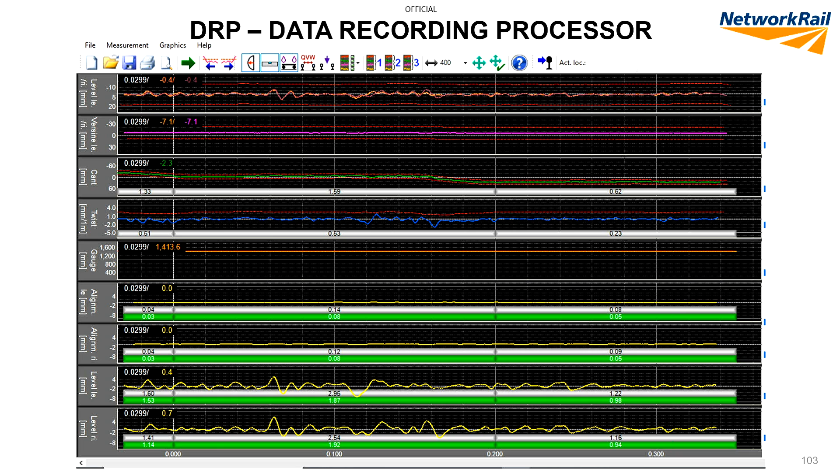Finally, DRP. It's a trace-like recording system that can record twists, level defects. It's got your track quality on. Again, it's Versine derived, not quite the same as Network Rail, but I have used this in the past to find some defects that I didn't actually see on a night. So it's a much better system than the current DAR.

And finally, on the 09, it's got an intelligent DTS system. So DTS is basically artificially induced track settlement. It doesn't damage the ballast, and this is fully flexible. We can fully control the vibration and the vertical load.

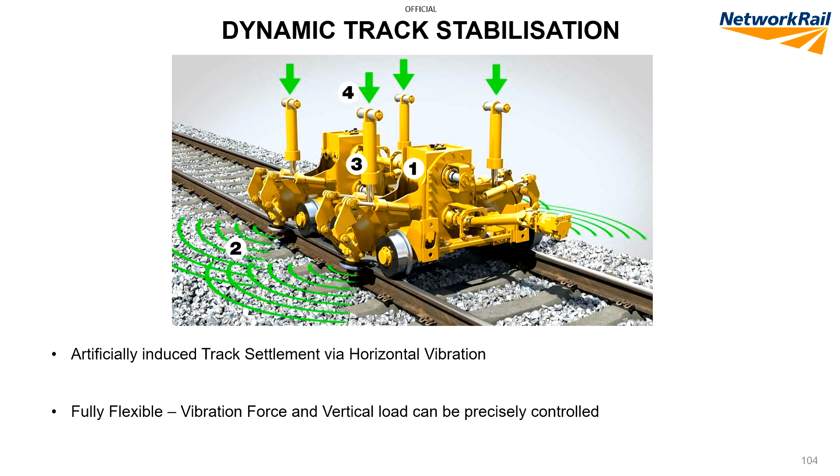There is a separate presentation on that, but that's another hour long, and I don't think I'm going to fit that in now. The advantages of DTS are high resistance to track buckling, higher CRTs, an extra 5 degrees, which we could all do with, especially on a day like this.

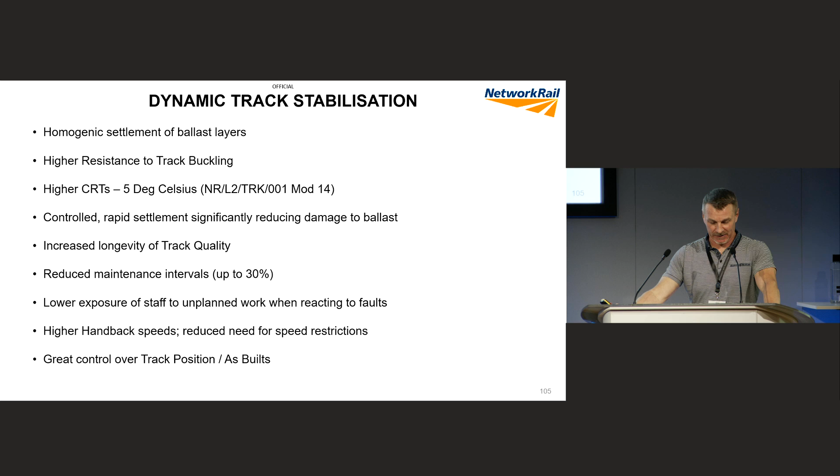Control rapid settlement, increased handback speeds, and, I'm not going to read the rest out, you can all read it, and I think that is just about it, just in time.